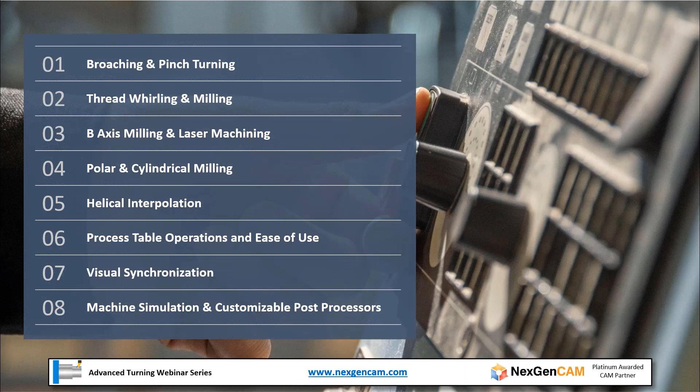First topic I wanted to hit was broaching. And there's 3 types of broaching that we're working on: rotary, punch, and nibble. And knowing we can't cover everything in here, if you're doing broaching, we have a basics video that we just uploaded this morning. It's 6 minutes 51 seconds on our YouTube channel. And thankfully, Christian, nice job, put this together to just go over the basics of this really quickly for you to see it.

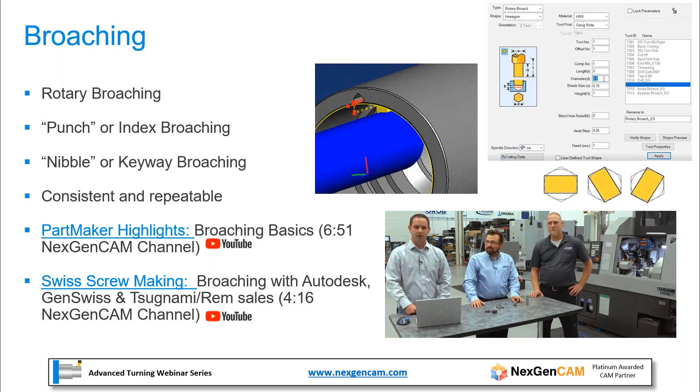And then on the higher end, getting into more complex stuff, there's a great video up here that Brian Denola put together. It's done together with Gen Swiss and Tsugami Rem Sales. It's bringing some really good people together to talk about broaching and the capabilities on the Tsugami that's on the screen. There's another video that you can go and catch.

On pinch turning, there are some different videos that we have that you can watch on this as well, but there's 2 different operational methods in here. And it's just something you've got to be able to do at the high end of turning, and it's certainly something that's in our packages. It's also included in the FeatureCAM solution, which I'm showing up here, a little bit of pinch turning, but it's also in the PartMaker solution as well, and kind of rounds out our whole solution, if you will.

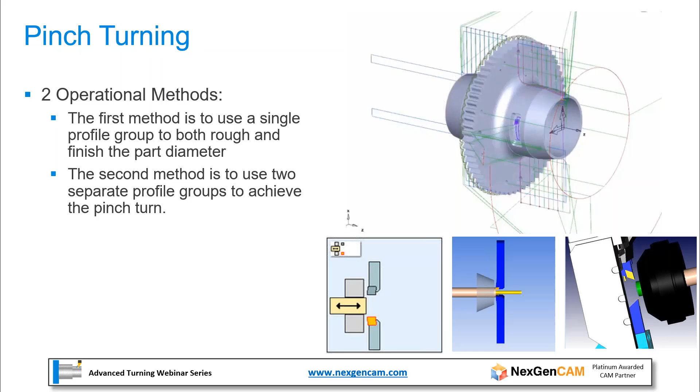So moving into thread whirling and milling, I think I did mention this earlier, but you can go to our website. We do have some of these videos and some of the stuff in more detail shown there. But PartMaker has the ability to do the thread milling, the thread whirling in there, and also creating thread milling hole groups and profiles. So these are nice capabilities. We'd love to go through it in more detail with you, look at the type of parts that you're making, and see how best we can help you.

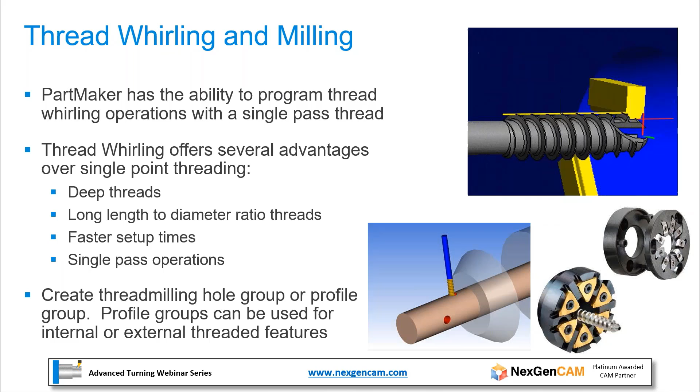Getting into B-axis milling and laser machining, I love the demonstrations where we cover this stuff and go into it. So it's going to be great. We're going to have Christian going through some examples with 2 different parts. I think the second part will be on this B-axis milling and go over it for positional and simultaneous.

On the laser side of things, this was added maybe just a couple years ago into PartMaker. We noticed a lot of the new machines are coming out with lasers. We've been adding it into the post processors. If you go to our YouTube channel again, there's a very basic video on laser machining that will take you through this.

One thing, especially if you're a current customer, we do have a huge manual written for PartMaker. I mean, it's massive. We have to send out a link because it's such a large file that you can go through. If you don't have a copy of that, send us an email, contact anyone from our team. We can get you a copy of this manual. And we've got this newer manual that does have a section in there on laser that would be accessible to you.

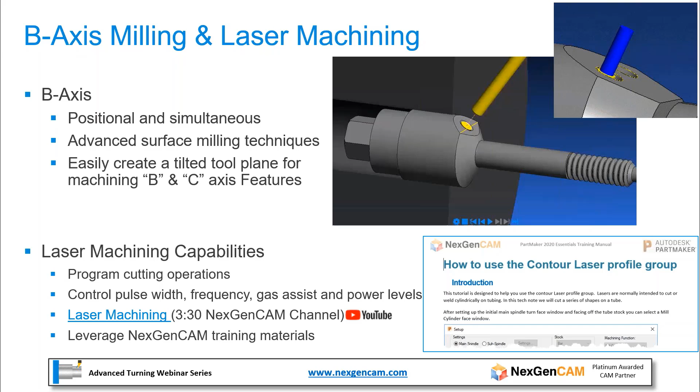Another good one here, just going into polar and cylindrical milling. When you look at these solutions and the mill features that can be done, it's just a lot of complex stuff being put together in here.

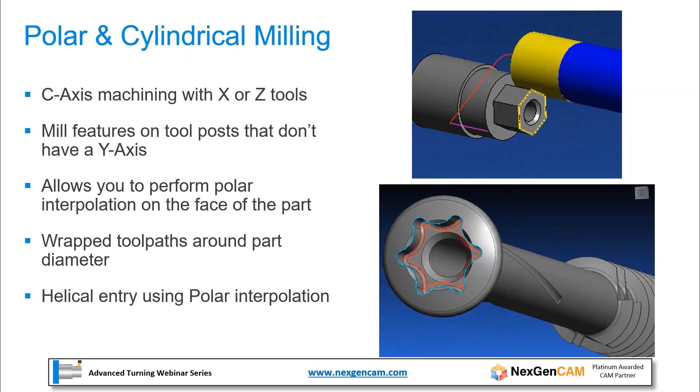Wrap toolpaths is a request we get a lot from people, and it's nicely done in this solution. Looking at helical entries will be covered in the second half of this next upcoming demonstration. So with no further ado, let's get into the actual fun part of this and look at the technology.

Okay, so on this part, we're going to be taking a look at 3 different operations within PartMaker: thread whirling, cylindrical milling, and lastly, polar machining with a Z-facing tool. So to start off, let's take a look at this thread whirling operation.

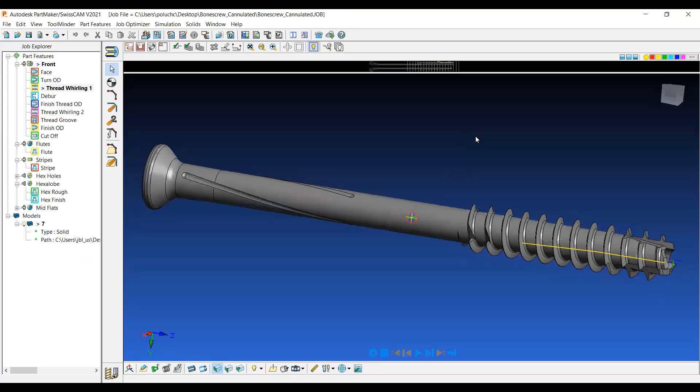As you can see, it's an odd-shaped thread that would require a custom tool shape. So if I go ahead and create a turn face window and a new profile group, I have the option as a strategy to pick a thread whirling strategy. In here, the parameters are fairly simple.

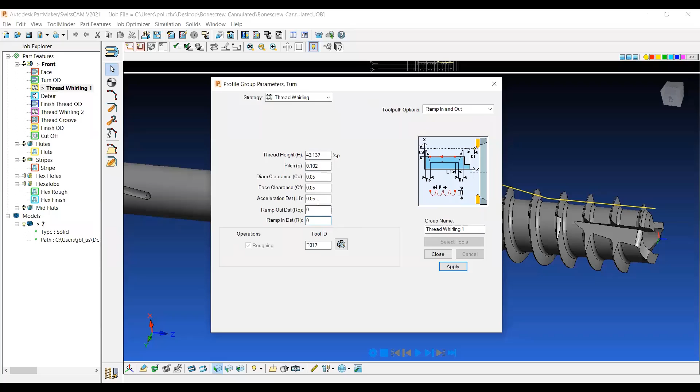We have the thread height, the pitch, and then some options for whether we want to ramp in or out - I have those set to 0 here. If we look at our edit tool dialog and see how we actually have the tool defined, we have a user defined tool shape - a custom thread insert, set up 3 times around the part. We can see that using our shape preview here.

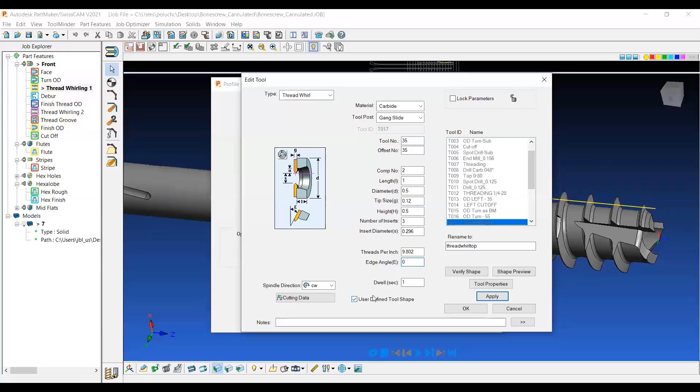Now we can also set this thread whirling unit at a slight angle if we'd like. I have it set to 0, but if it's at a couple degree angle, then we set that as our edge angle. I'm going to go ahead and apply and close that.

Let's just take a look at the profile itself. For a thread whirling toolpath, you select it off of the major diameter, just the same as you would with a standard threading operation.

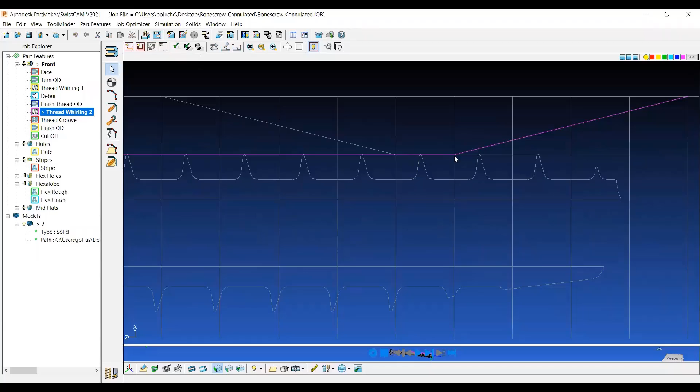I'm going to go ahead and pick some points that I have defined here, and then we can use the angle here to get out of the thread. That will eventually meet back up with another thread whirling operation that we have, and those are overlapped by a pitch, which is why you see this grid - those are just increments of the pitch. But in short, that is the thread whirling operation.

Simply just select the thread whirling strategy from a turn face window, and then set your tool parameters as you have it set up on the machine.

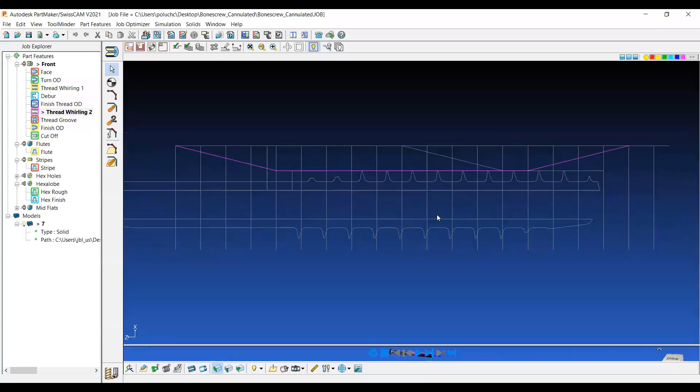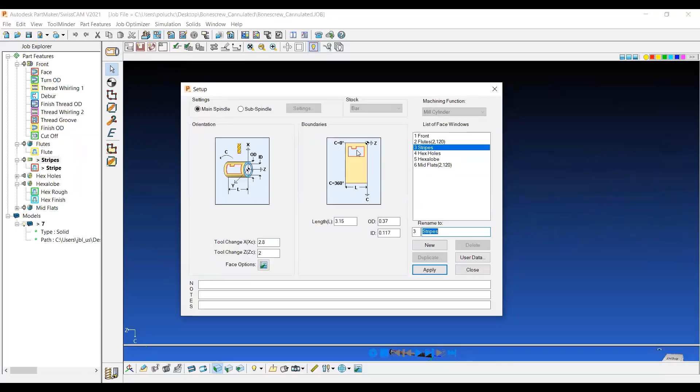Next, let's take a look at the cylindrical milling within PartMaker. First thing, we're going to open up the setup dialog, and we can see here that a mill cylinder face window is the correct face window for any sort of cylindrical milling. What we're doing there is unwrapping the part into a flat surface, and then we're going to take our profile group and rewrap it around the part.

So let's just take a look at these stripes that are around the part. There's 3 of them here. So we'll quickly go through and recreate this the way that it was originally done.

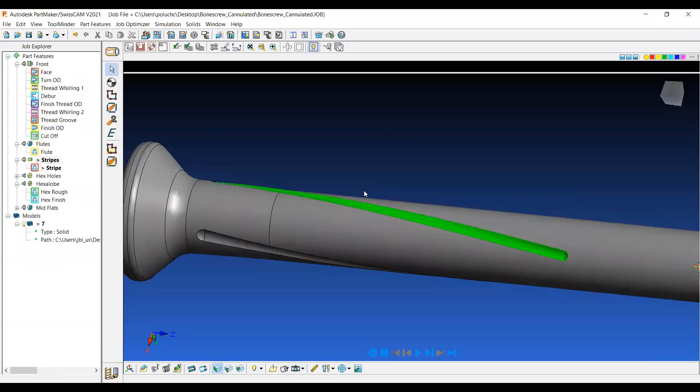So we can just delete the geometry that's in here, and then let's go ahead and select the surfaces. Since we're in a mill cylinder face window, when we extract that geometry and project the outline, it's going to project it onto a flat plane here that will later be wrapped around the part.

As you can see, the geometry of the part has been unwrapped, with C0 being at the center, C minus 180 at the top, and positive 180 at the bottom.

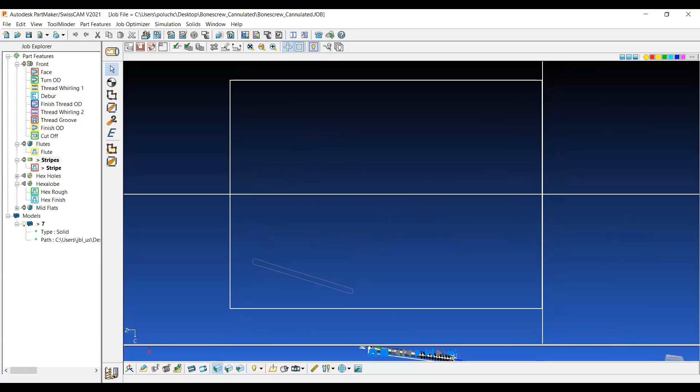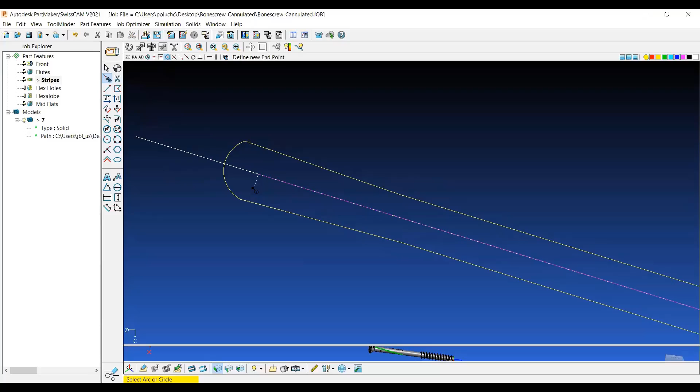If I go back to my CAD side, we can draw a line that will just run down the center of this. To do that, I'm just going to measure a couple points here - that gives us about 50 thousandths. Then we can use the parallel element icon and say 25 thousandths from that top line, and then use the trim extend icon to bring us to the back of the part here. So that gives us the line that we're actually wrapping around the part.

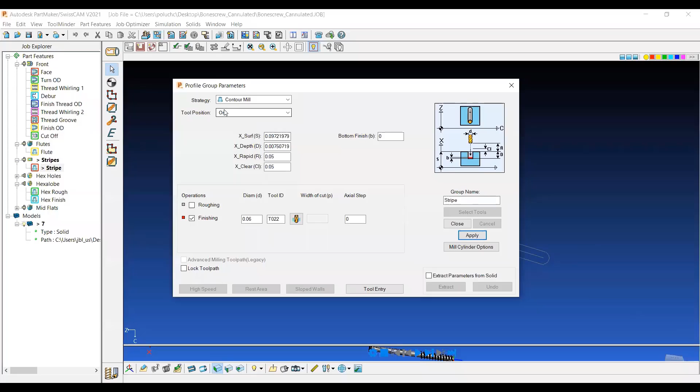We'll go ahead and select that profile. But before that, let's take a look at the strategy we have here. This is going to be a contour mill strategy with tool position on, just on center of the line that we have drawn. To select the surface and depth, we've done so directly off of the model.

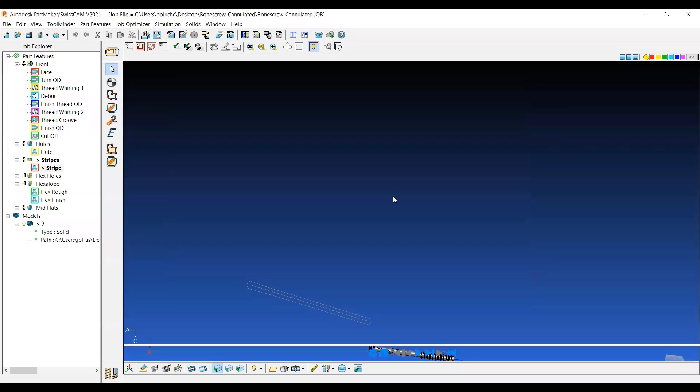If I say extract parameters from solid, I can pick one of these stripes here, hit extract, and that gives us the X surface and X depth. We have a 60 thou ball mill selected, so let's go ahead and pick the profile, using the define profile icon to select those 2 points. Now we can see that profile has actually been wrapped around the part.

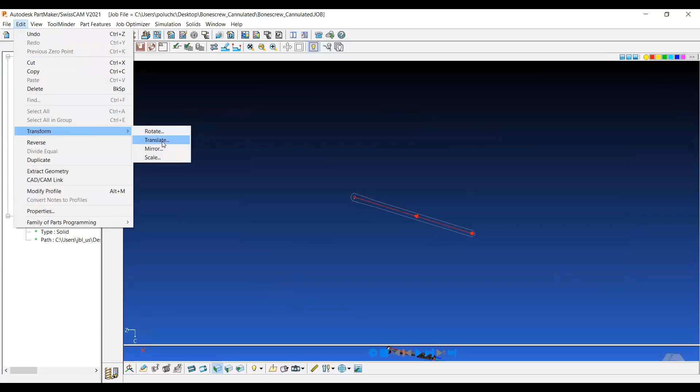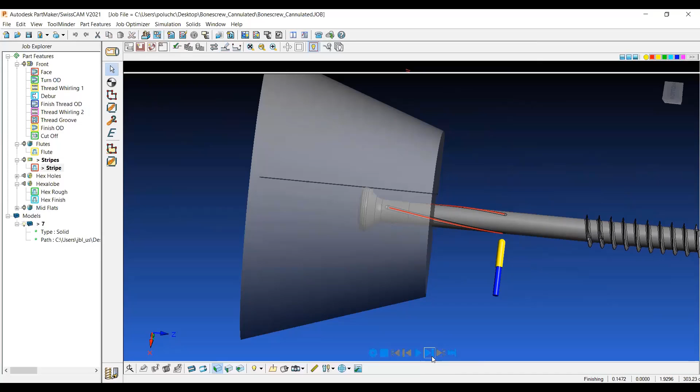Now, if we want to copy that, there's 3 total on this part. We can select the profile itself, go to edit, transform, translate, and add a couple copies - 2 more copies at 360 divided by 3 degrees in the vertical distance, and hit translate. Now we have 3 wrapped around the part. When I single step through here, you can see the part rotate, and then we have our toolpath. Okay, so lastly on this part, we're going to take a look at some polar milling on the back of the part.

So if we go to this hexalobe face window, we'll go to the setup dialog. You can see for polar machining, we're going to use the mill end polar face window, and that's going to take any kind of Y coordinate and turn it into C coordinates. In this case, we're doing that on the sub spindle.

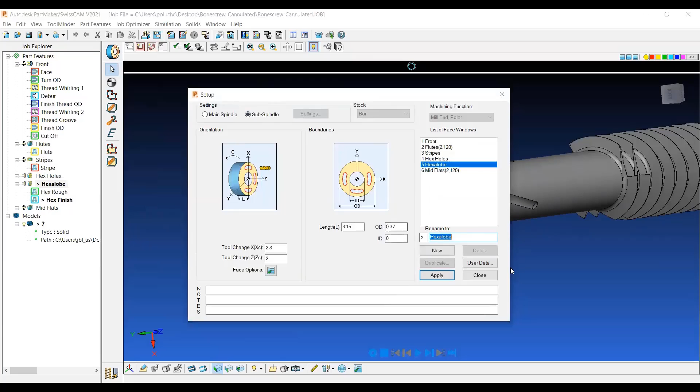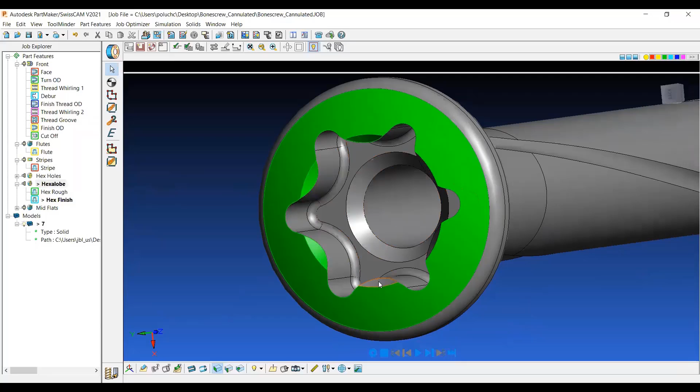To come up with the geometry itself for this, we would do that the same way we would any other type of milling within PartMaker. So if I delete that geometry, I can delete the toolpath itself here, and then we'll just pick the surfaces off of the model that we want to project up top. And then we will convert curved edges to arcs. Now we have a profile that we can actually select.

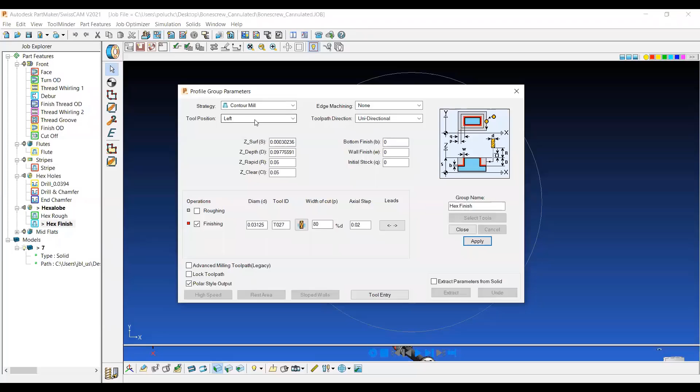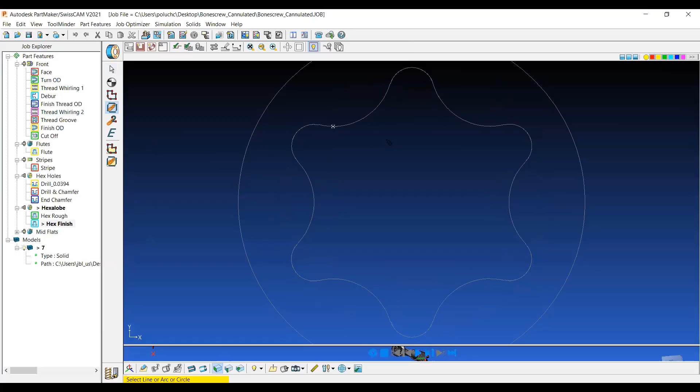The toolpath itself on this part is just going to be a contour mill, left or right, left being climb mill. Now to get the actual depth on the model itself, we can extract parameters from solid, and I'll click the top surface, hold shift, select the bottom surface, and hit extract, and that gives us our Z surface and Z depth. And then let's go ahead and just select the profile itself.

So being that it's a left toolpath, we want to change the direction. I'm going to hit reverse, and then we'll go ahead and verify the toolpath. So it looks like our lead in and lead out is not working how we would like it to. So let's go ahead and change the start point.

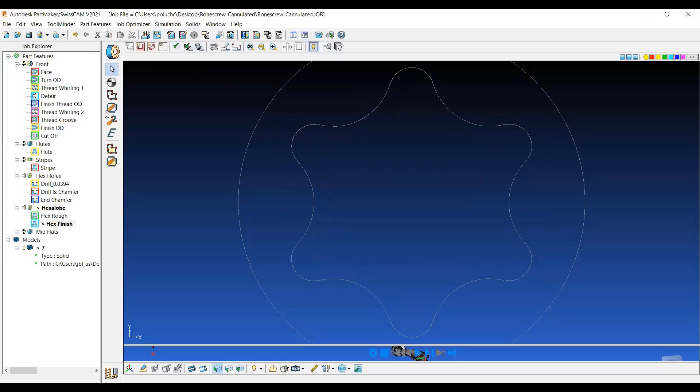Now the start point can be done by selecting a different point off of the model. So if I select that point and then we'll verify again, it looks like we will need to actually modify our lead in and lead out a little bit. So just for this example, we'll go ahead and change those to 0, and we'll see how that works.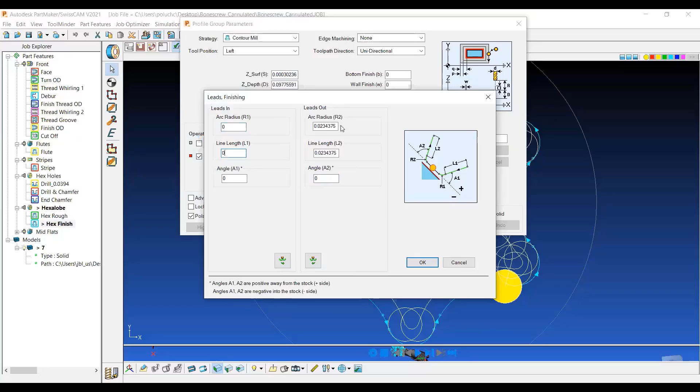And that looks a little bit better. Now we're not cutting into the edges of the part, but we could modify the lead in and lead out to actually come to the center if we choose to do so.

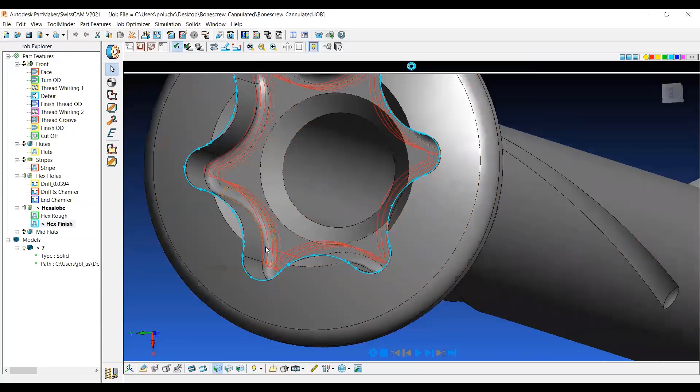Now, for this example, what we have the tool doing is stepping down. If instead we preferred to do a helical motion using our C-axis, we can open this up, and then I'm going to turn on the Advanced Milling Toolpath checkbox, and under Advanced Tool Entry, we'll go to Follow Toolpath and do a max angle of 1 degree, and apply and close. And then actually the last thing before that is to set our axial step to 0 so that we're not doing any passes downwards - we're just using the helical motion.

So let's go ahead and single step forward. And then now we can see if we play through that it's going to do a helical motion all the way from the top to the bottom of that polar machining operation.

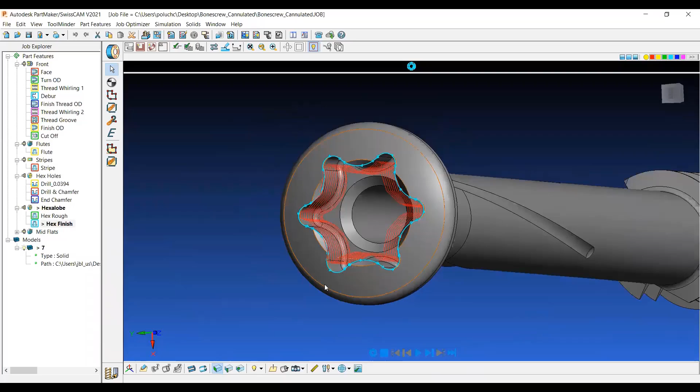In this example, we're going to take a look at how to mill a 5-axis feature, or a B-axis feature, onto a part within our PartMaker SwissCAM. So the first thing we're going to do is go to our setup dialog, and we're going to create a new face window. In here, we will choose the mill 5-axis plane. I'll call that mill 5-axis.

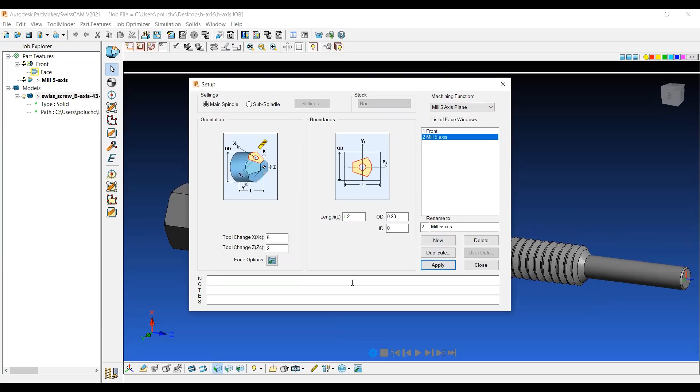And we'll hit apply. Now there's a few ways that we can actually go ahead and create the B and C angle as well as the local coordinate system. If we go into face options here, we can manually do that, adding our B and C as well as our local coordinate system. Alternatively, we can utilize the model itself.

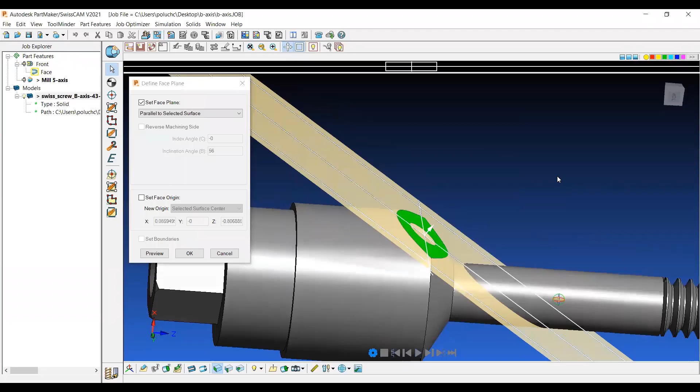So if I select this surface here and then I select define face plane, it's automatically going to put our local coordinate system of that face plane on our feature that we selected, as well as setting the B and C angle of it as well. So we'll say OK. And then if I click on view normal to face plane, now we're going to be looking straight down at that feature.

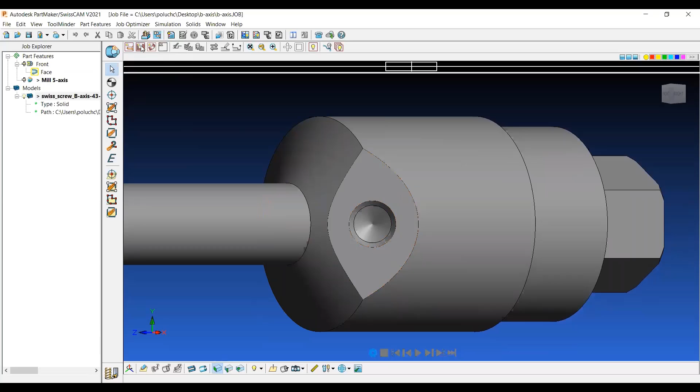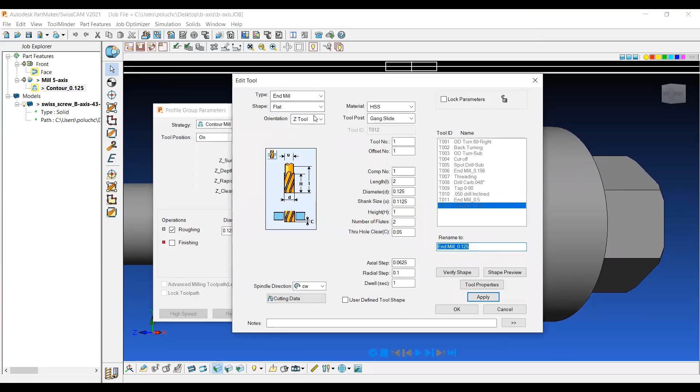For the size of this flat, I'm going to use an 1/8 inch end mill. So if I select a new profile group, I can just say we'll do an on-center contour mill. I'll search my tool database for 1/8 inch end mills. And we're going to want to pull up a Z-oriented tool anytime we're using the B-axis. So we'll go ahead and say select. We'll verify in our tool that it is actually oriented in the Z direction. And we'll say OK. So we'll call this mill flat

and hit apply. Now just to verify, if we extract parameters from the solid, and click on that face, we will get a 0 depth and surface because that's where our face plane is currently located. So that should be correct for us. So we'll say apply and close.

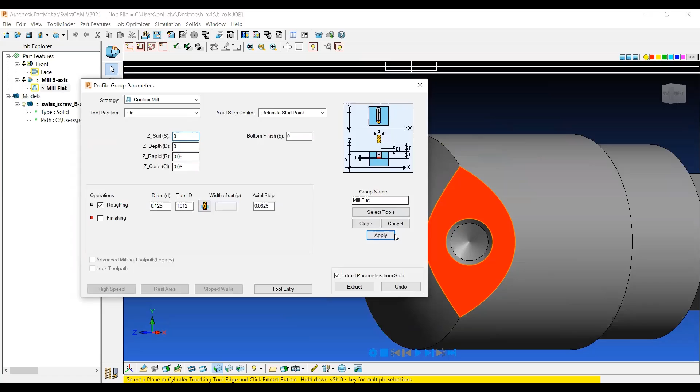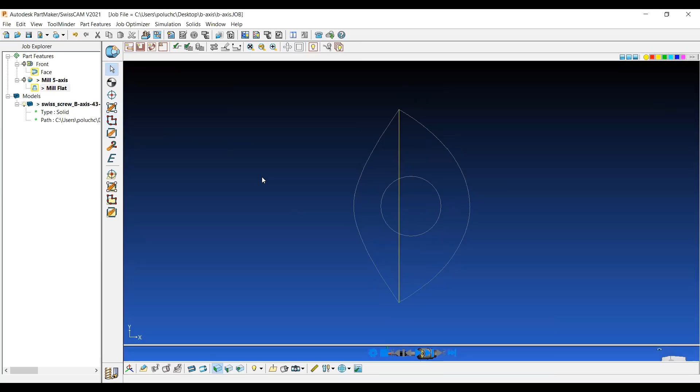And then I'm going to go ahead and double click on this feature right here and transfer that up into our 2D window. If I go ahead and select the define profile icon, I'm going to select these 2 points here, and we can verify that toolpath on the solid itself. So let's go ahead and press single step and click through this, and that looks like a good toolpath clearing off that flat.

Now we can also do drilling just the same way in our B-axis planes. So if I select a new hole group and we use extract parameters from solid, I can select the inside of that hole, hit extract, and then add a new cycle for this.

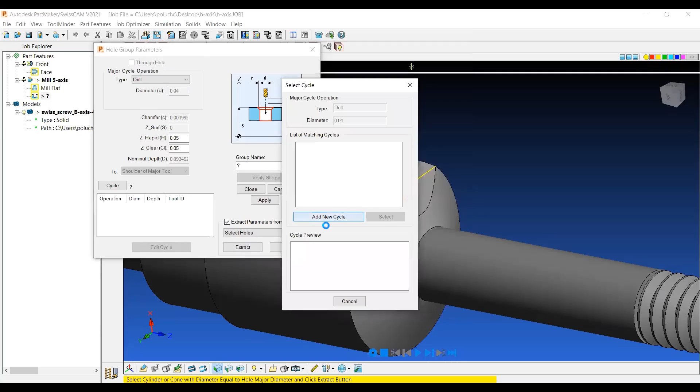So in here, it looks like it's a 40 thousandths drill. We're going to insert an operation and do a spot drill with spot face, and I'm just going to pull up an 1/8 inch spot drill for this. So let's go ahead and select tools. We'll add a new one for our spot drill, and that's going to again be a Z tool. And then again for the 40 thou drill itself in the Z direction.

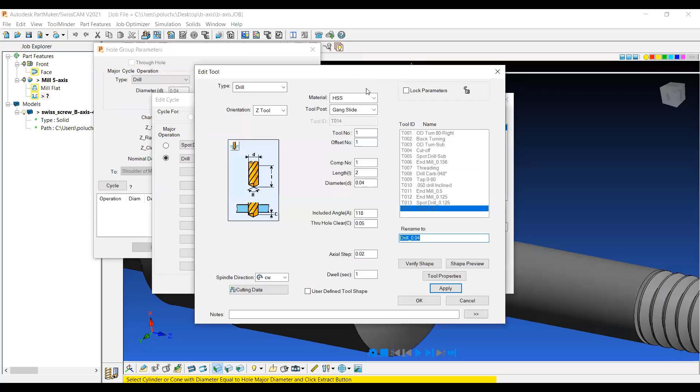Okay, so we'll say apply. And then before we exit this dialog, we're just going to change the spot drill hole diameter size to match what it's actually putting a chamfer on, which is a 40 thou drill. So we'll say apply and OK.

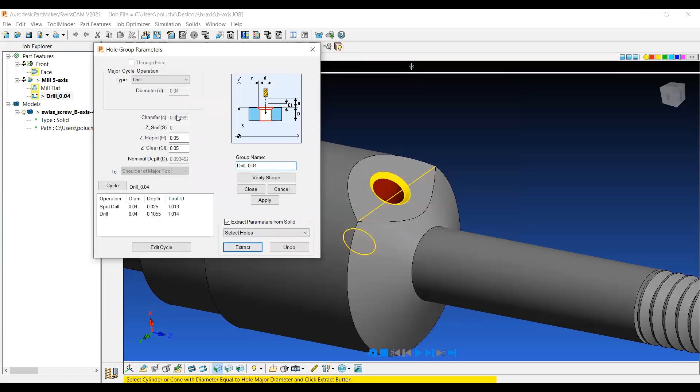And then the software itself already pulled the chamfer size as well as the depth, so we can apply and close, and then use the single hole on solid model icon to select our hole. And we'll go ahead and single step through and verify this toolpath.

Thank you, Christian. It's always fun to watch those and just see the parts spinning and all the different options that are available, which is so important to make sure that you can match the capabilities of the machine into the software. In the next demonstration, we're going to go over this and show it, but the process table is really the key area that makes PartMaker really unique.

This is a purpose-built tool. It was originally built to run on Swiss machines, and you start to see that here, that we're kind of taking something complex and making it easy with this process table.

So if you look in part A, it's just get all the operations in there, all the things that you want to do. And then in part B, we're looking at, okay, am I utilizing my different spindles, and am I moving the part around? And then literally, this is where you drag and drop and you move stuff.

So if you're doing Swiss today and you're doing cut and paste, a lot of people are cutting and pasting codes from different areas and try to put them together. This is like your replacement of that. This is, without all the cutting and the pasting.

You can go in here and you can experiment, you can move things around. And as you do that, it's showing you the cycle times down below. This is so key because you can do it offline and you're not necessarily utilizing the machine. This here part, which is kind of a patented part of PartMaker, is what makes it so good.

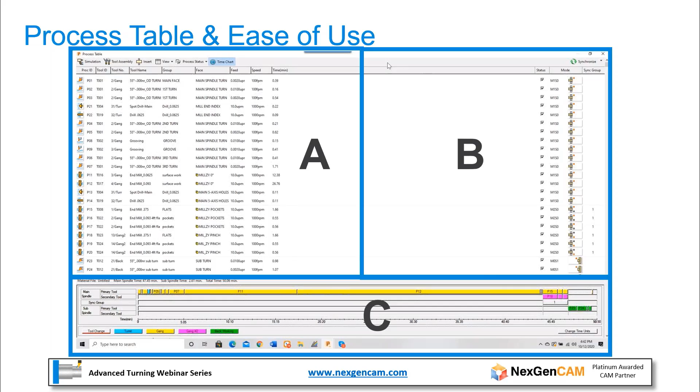I was talking to a president of a medical company, and PartMaker is used extensively in the medical space, and just was going over this with him. He was just talking about how this one table has really dramatically changed the way that they work. You think about it, if you're running a Swiss machine, you're doing very much a linear programming. You're piecing things together and trying to encapsulate everything that's going to happen.

And the moment you've got to change something, you have to go back and start linearly and do this over again. People that get proficient with PartMaker, it kind of changes the way they think about it. The first thing they're doing is saying, hey, what machine am I running this on? I want to get the best toolpaths for that machine and just get them on the part, throw them into the table. Then I start to move things around and choose the best order of operations to get everything done.

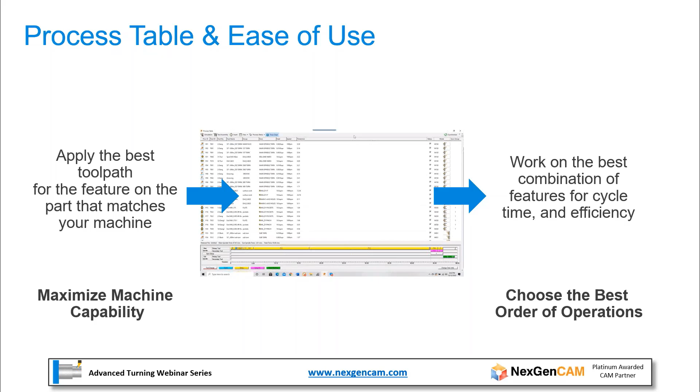The nice part is you don't have to check all those transitions. PartMaker's doing all this for you. All the transitions are going to be handled. And if there's an issue, this table is going to let you know. The visual synchronization that's in there is very helpful.

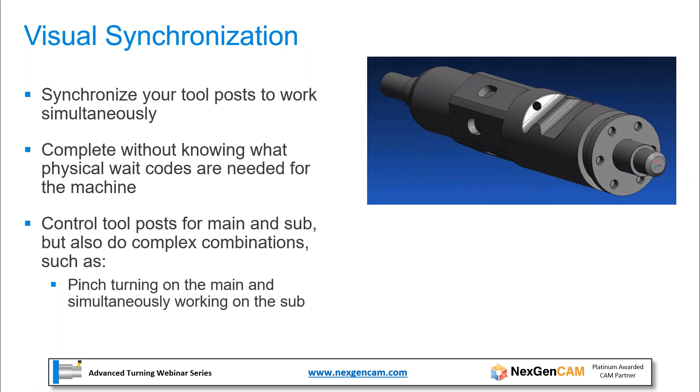We're going to go over this example with this part, and it's going to allow you to do complex combinations of things very easily. We support up to 4 turrets and 2 spindles, so bring the complex machines on and let us know what you've got in turning, and we can sit down and work with you.

Speaking of complex machines, the heart of this solution is the post-processor system that's been built. We have over 900 proven post-processors, and for some of these there's multiple different versions depending on what they are. I just took a list of all the manufacturers that are listed in here and threw this up, and I may have missed one or two because I did this kind of quickly, but a ton of work has been put into these. And if you know the effort that goes into getting these to really work, this is kind of a work of art that's been put together here.

I know we encounter a lot of people, and they'll say, well, I have a Swiss software that can run my machine or that I've purchased. And a lot of times that means that they've done a lot of work on one post-processor for one of these machines, and now they're marketing it as a Swiss solution. The other thing is these are open, so they're not necessarily locked. It means you don't just get the base post that everyone in the community gets. You can get one that you can edit and you can change.

And Christian, you were around when they were building all these and been a part of that. Obviously, we're still building new ones. What are your thoughts on the post-processor engine? Yeah, like you said, Eric, I was sitting next to a lot of these guys as many of these posts were being written, and it just took tons of work and an incredible amount of knowledge in the Swiss and multi-axis industries to be able to get all this done.

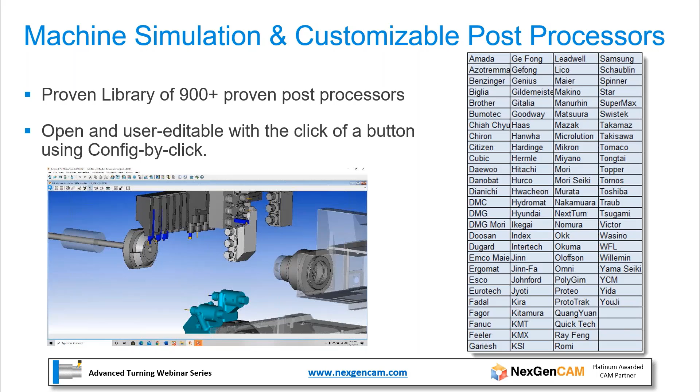Okay, at this point, we're going to move in, and Phil, I'm going to hand it over to you to go ahead and go through this.

Autodesk PartMaker SwissCAM. This allows the programmer to quickly and easily create toolpath strategies for their Swiss programming machines. With the use of our predefined construction planes through the Setup dialog box, we can quickly and easily create construction planes for working around the part when we need to create the features. Once the toolpaths have been created, we then generate our process table.

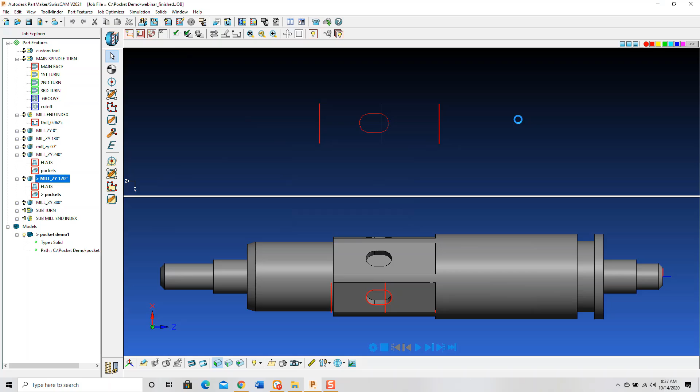The process table in PartMaker is a very, very handy tool. In the process table, we will list the toolpaths that you've created, the tools that you're using, and also on the right side of the screen, the synchronization buttons that you can use to synchronize toolpaths together, whether you're doing two tools on the main spindle, a tool on the main spindle, a tool on the sub-spindle, synchronizing both together. PartMaker makes that process very simple.

If we need to reorder operations, we can do that easily as well. For instance, my spot and drill on the face of the part, I am going to do right after my first turn. So I just grab the toolpaths and stick them where I need them. On the right side of the page is our synchronization options. This is PartMaker's visual synchronization technique. You can actually read through what you're trying to accomplish on your machine.

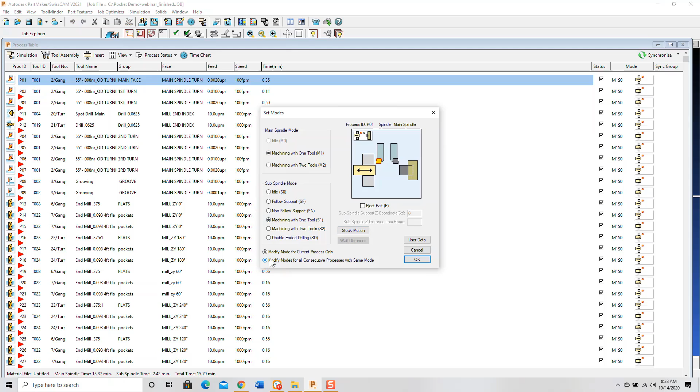For instance, in this case, I'm machining with one tool on the main. If I want to be machining with one tool on the sub, I simply let the system know I'm machining with one tool on the sub. And if I want all the main processes to do the same thing, I can modify the mode for all the consecutive processes. And you'll notice that on the right side of the screen, the system is now showing the main spindle and the sub spindle looking at each other, or working together, if you will.

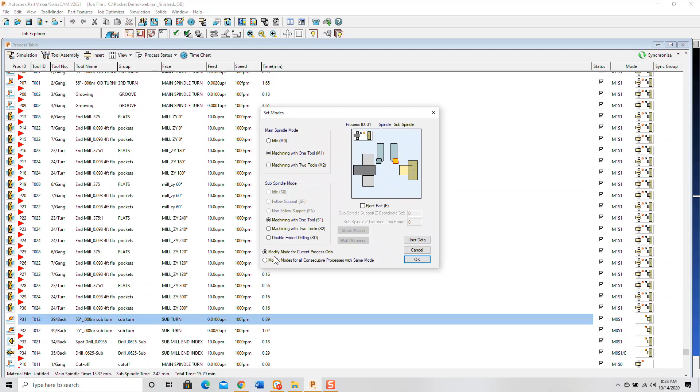The sub side is the exact same thing. I pick my first sub operation. I tell the system that I want to machine with the main spindle as well while I'm working on the sub. I'll do that for all my sub operations. Select OK, and I now have my toolpaths synchronized together.

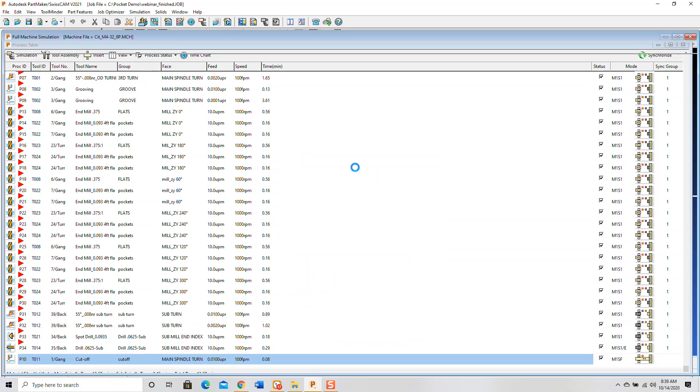The cutoff process, I'm going to support that process. Put in the grip length, synchronize the toolpaths together, and now I have a toolpath completely synchronized between the main and the sub spindle. Using our full machine simulation, I can verify and simulate the toolpath work.

And remember, in this case, this synchronized state is one of the easiest to create. We're just mainly using the main and the sub spindle to do the work at the same time. We can create many more complex synchronized states. And as you can see here, once we pass off the part to the subspindle, the main and the subspindle will be working together.

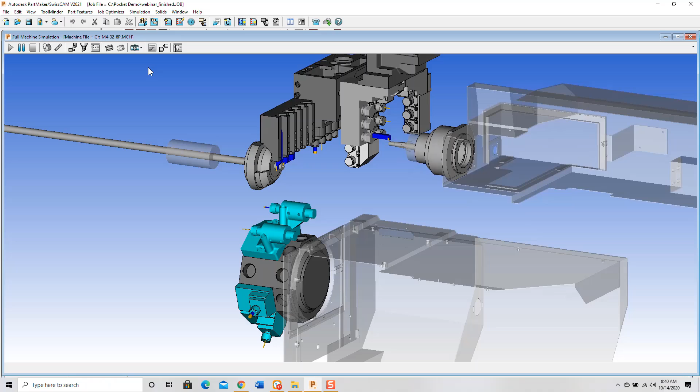As you can see, I'm using both the gang and the turret to machine the flats and the pockets. At this point, the system will start working together. And as you can see, I've got a simple synchronized toolpath. The synchronized states in PartMaker can be much more complex than that, though.

Let me call up a quick example of using the gang and the turret together, and then synchronizing the rest of the toolpaths so that once the gang and the turret finish their work together, then the system will go into a synchronized state.

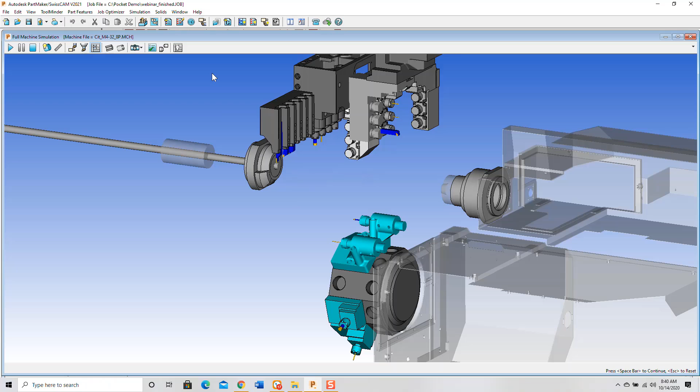This particular process table, as you can see, I've got multiple sync states going on here. The first sync state is the main spindle and the subspindle working together. The subsequent synchronized states are two tools working on the part at the same time on the main spindle. And since I have multiple pockets, this is going to be a very efficient way to machine the part.

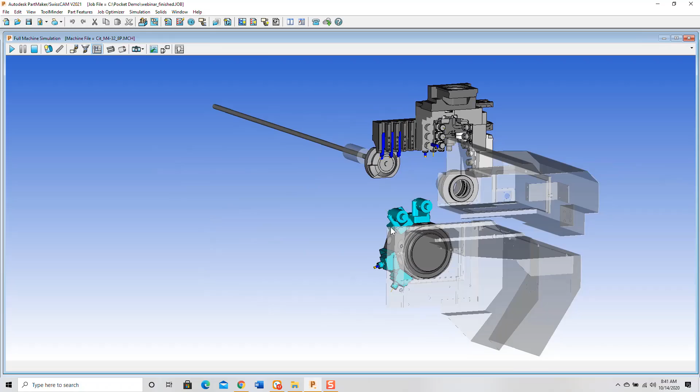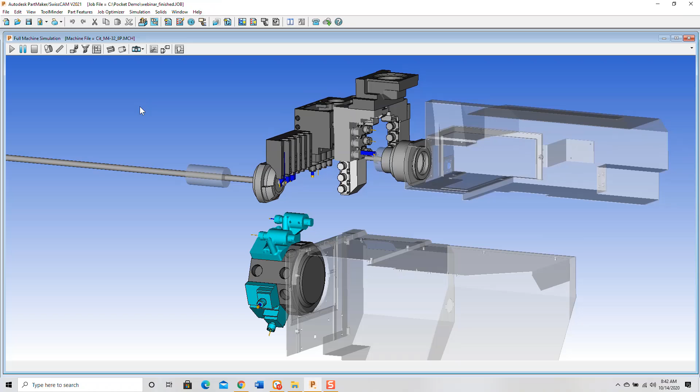Once again, using my full machine simulation, I'll rotate the simulation into a view where I can see everything working, and we'll go ahead and run this. And as you can see, I'm using two tools on the main spindle. Once that operation is finished, I will pass it to the sub side. And the machine is now in synchronized mode.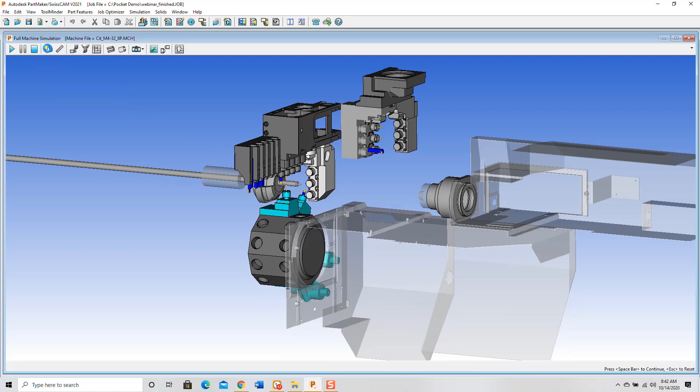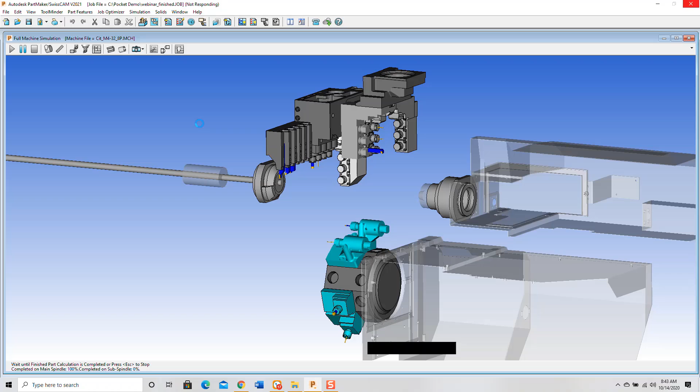Once the part is finished, I can stop the simulation, reset it, and show finished part. And here's your finished part. At this point, we're ready to generate some code.

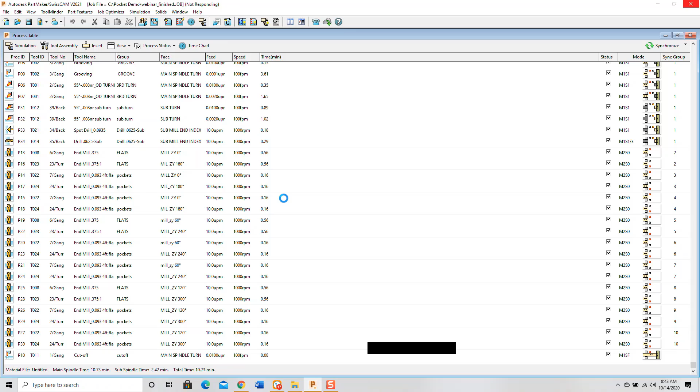So all I need to do, set up my post options the way I want to see them. Select OK, generate the file. And let's view the NC program. So there it is. With PartMaker SwissCAM, your Swiss programming capabilities will be exponentially expanded.

All right, thanks, Phil. It's just great to watch that with all the simulation coming together. It looks like there was a processor there where it was just a little bit slower, but fantastic work just to see it all come together.

So just an overview of this solution. You know, you think about there's 5 different steps that you're going to go through with a Swiss machine in order to get your parts, high quality parts, done quickly. The first is the CAD space. So we've got a CAD solution that's included with this solution. And the other thing that's nice is the moment you pull something into PartMaker, it's instantly giving you a lot of the data that you want to instantly interrogate that model and see if it's going to be something that will work.

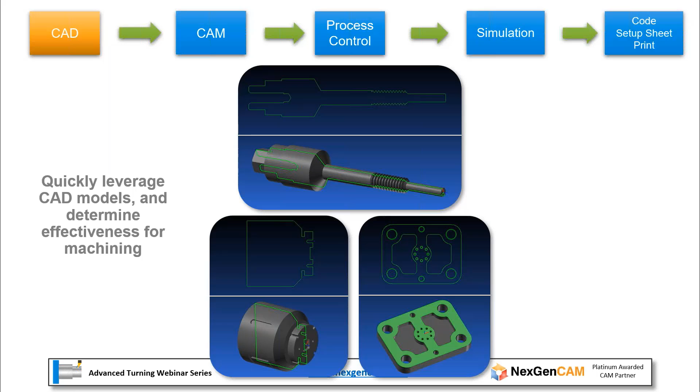We know a lot of CAD models that you get are not exact, and you've got to do a little bit of work on them. So at that point, you pull it into the CAM system. The nice thing about PartMaker a lot of people really like is you can combine 2D, 3D, or a combination of those together to get exactly what you want. The strategy that we have in CAM, which I mentioned earlier, is just get all of the operations on there. So that's what you see in the top level here, is just let's put all the operations in there.

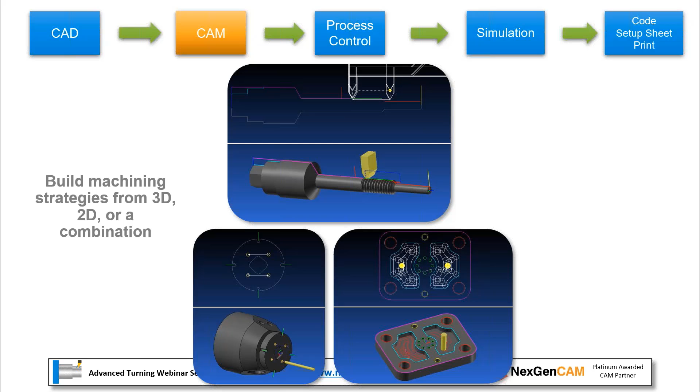Some people aren't aware we share some of the same milling kernel with PowerMill, so you've got a lot of capability here from the milling side as well. And so the CAM is all about just getting them in there. And then back to this process control. Experiment, drag and drop, reduce your cycles. This is where we make it easy with this purpose-built tool and solution.

And then we move on to what Phil had just showed us, which is, hey, let's actually simulate this. And isn't it nice to be able to look at it without all the coolant in the way and the machine moving and trying to peer around corners? You can turn things on and off and really view and see what the machine's doing. I know for people that just have bought a new Swiss machine, this can be good to have the simulation to help you just to see how the machine moves and get orientated.

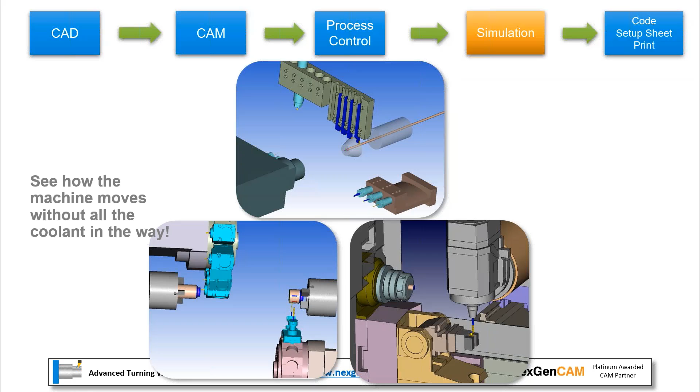And I know for a lot of you that know Swiss and you just know it really well, at some point you aren't using this at all. You're just looking at the code, and you've come to a point where you're trusting PartMaker after using it, and you're just having a good experience.

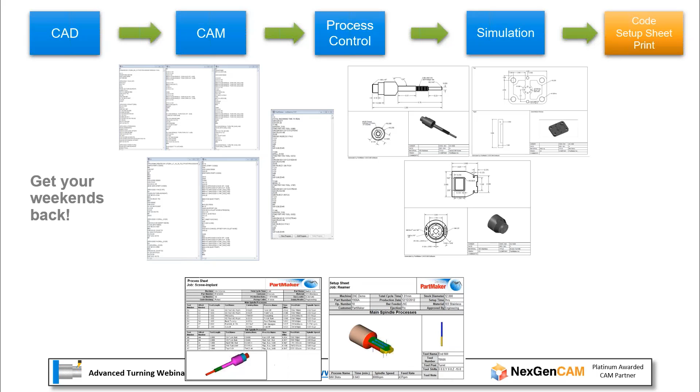Lastly, all the documentation that comes back with this, I put this note in here, get your weekends back. If you have a split where you're the programmer and you're sending it out to the machinist, this is a great solution. This can also be customized, but you can get all kinds of data out to your team so that they can have confidence to move ahead with the programming.

So just in summary, we've got one more slide after this. We've gone over Swiss type lathes and the solutions that we have to meet them. These are tremendous machines, fantastic. We know there are a lot of them being bought in industry, and there can be some stress and a lot of risk in these machines. And what we're doing and showing you here today is how we can reduce that risk for you in your shop. We can help you to program parts faster with more confidence, reduce the number of errors that you've got.

And I think this last bullet is also important, is people are always looking for a way to have higher margins. And if you can do smaller runs or more complex parts, this is where we're kind of enabling you in this process with this solution.

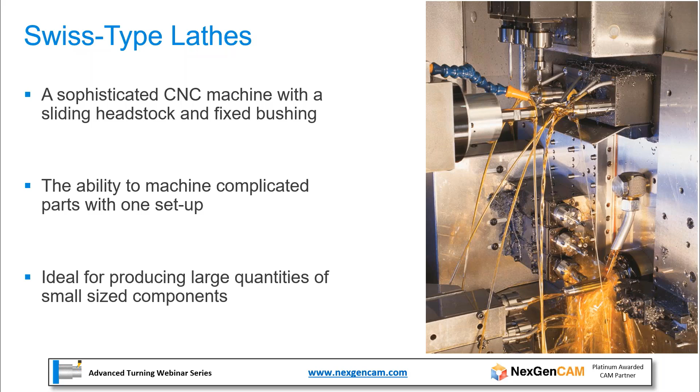So in summary, at the end, this is the second part of a three-part advanced turning webinar series. The same time next week, we will be going over manual programming. So we're going to go over how our solutions help you with your manual programs, and then also what are some things you just should never do in manual programming. It just would take too long.